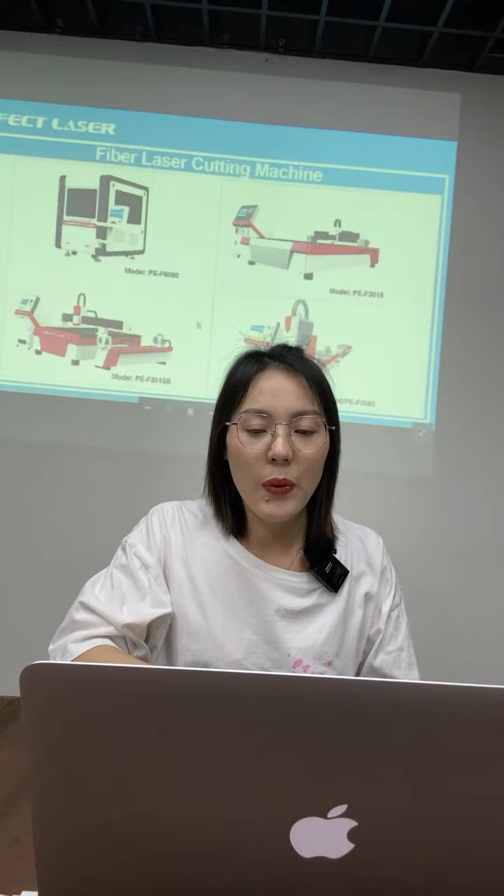Now let's get started to the products, to the machines. You can see we have many different types of fiber laser cutting machines. The first type is a full enclosed type, this one, model PEF6060.

For this model, it has a 600 by 600 millimeters working area. And you can see the second model, PEF3015. This model has a bigger working area, so you can choose such as 3000 by 1500 millimeters, and some other working area based on your request.

For the model PEF3015, this model is a very hot selling model in our company. This one is mainly for cutting flat materials, for all kinds of metal materials, such as stainless steel, carbon steel, mild steel, galvanized sheet, aluminum. For different thickness, such as 1 millimeter, 2 millimeters, 3 millimeters, 5 millimeters, or some other thick material.

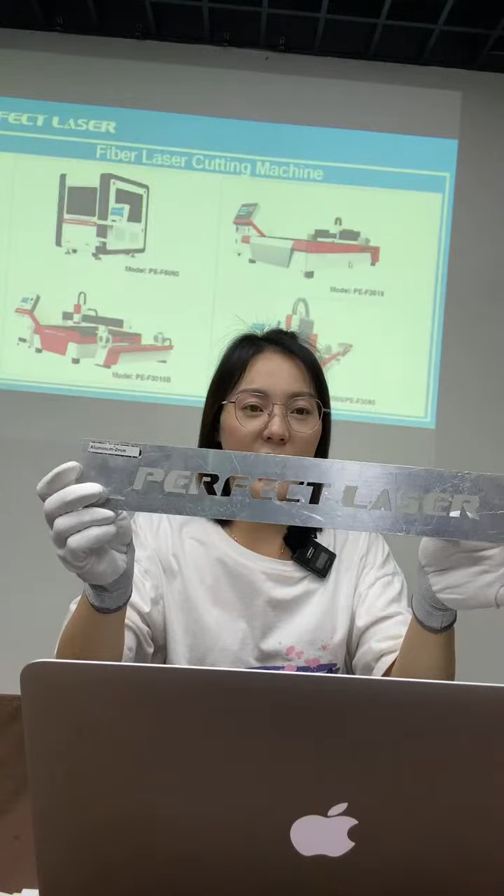Okay, so you can see, such as this one. This is a Perfect Laser, this is our complete name. This one is aluminum, 2 millimeters thickness. The material thickness will be 2 millimeters, and this is an aluminum material.

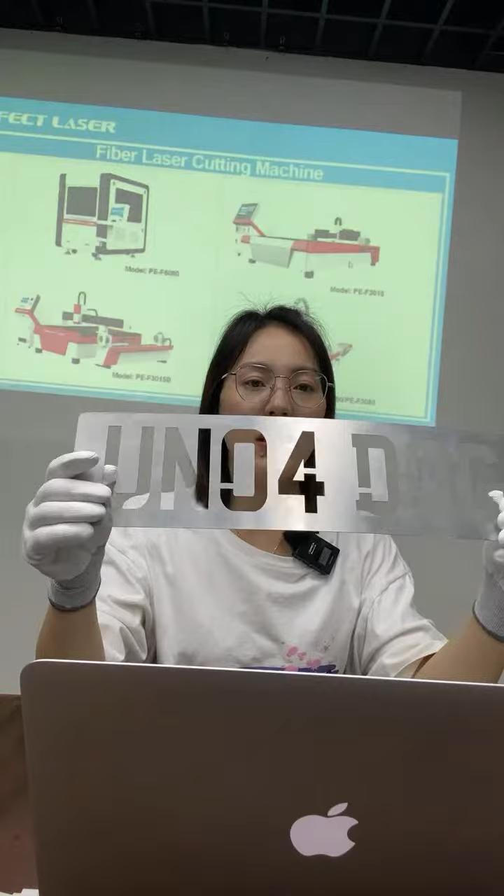Well, some other one, this one is also an aluminum material, but this one is very soft.

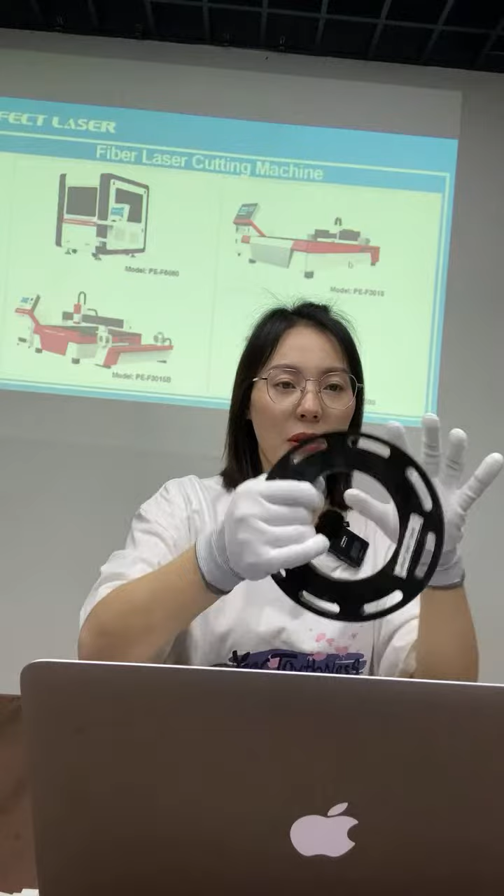So this is, and also for some, I would like to show you some thicker one. Well, for this one is very heavy. This is a carbon steel 12 millimeters. Wow, carbon steel 12 millimeters. So you can have a look. Yeah, this is a carbon steel 12 millimeters.

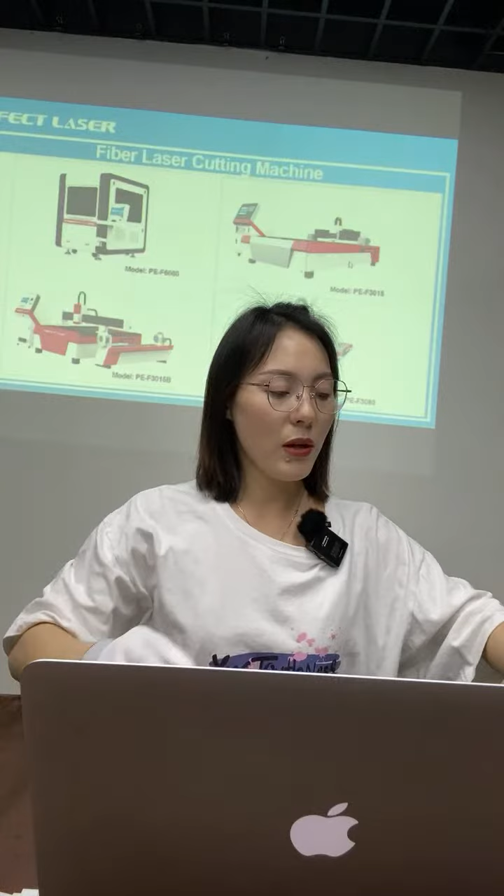Okay, and well, and also this one, well, it's a star. This one is carbon steel, 15 millimeters. Wow, very thick.

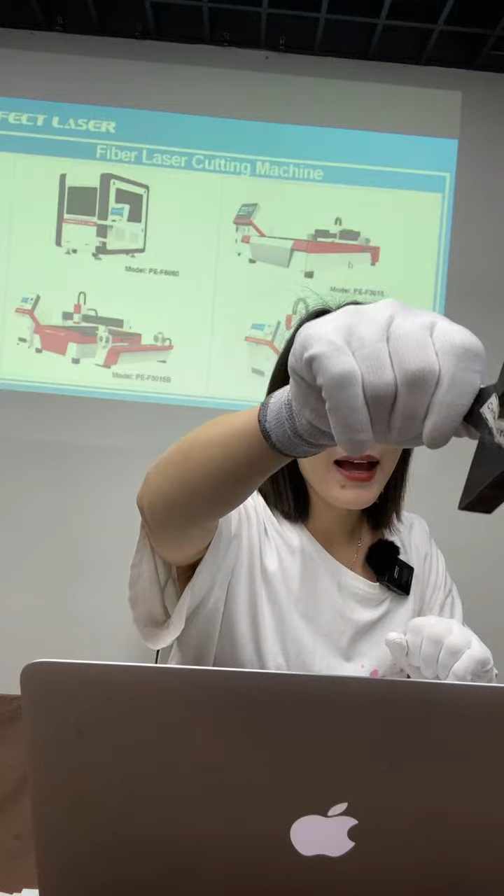Yeah, hello everybody. So you can see right now, this is the fiber laser cutting machine. Fiber laser marking machine, fiber laser cutting machine.

Sorry, so this is a carbon steel, 15 millimeters thickness. Wow, it's very thick, right? So you can see the cut, it cuts like this kind of different shapes, different patterns, different designs.

And well, also for some high precision cutting, you can see even the very small curves there, right? Very small curves, very small part, it's very tiny part. The fiber laser cutting machine, it also can have a very precise cutting effect.

Okay, well, and also this kind of, well, you can see this different, it has many different shapes, different design, different patterns there.

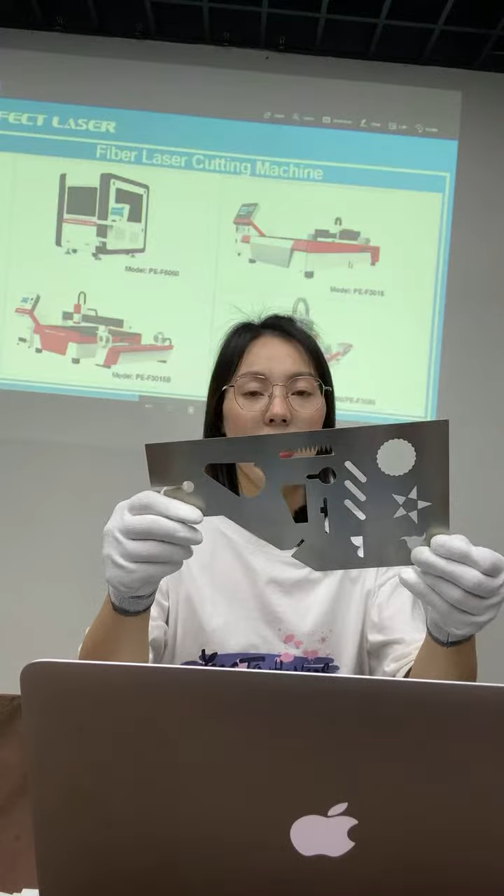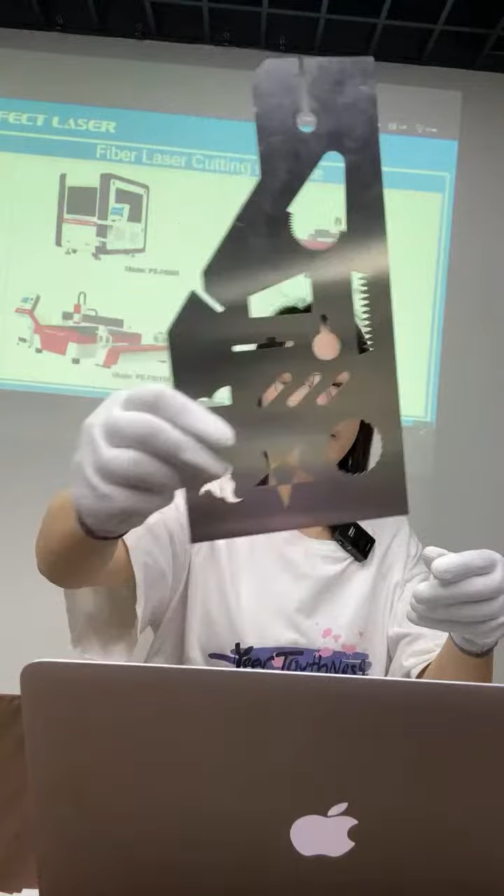So the fiber laser cutting machine, it has a very good cutting effect.

Yeah, and also this one, wow, this one is very nice. It's a big thumbs up.

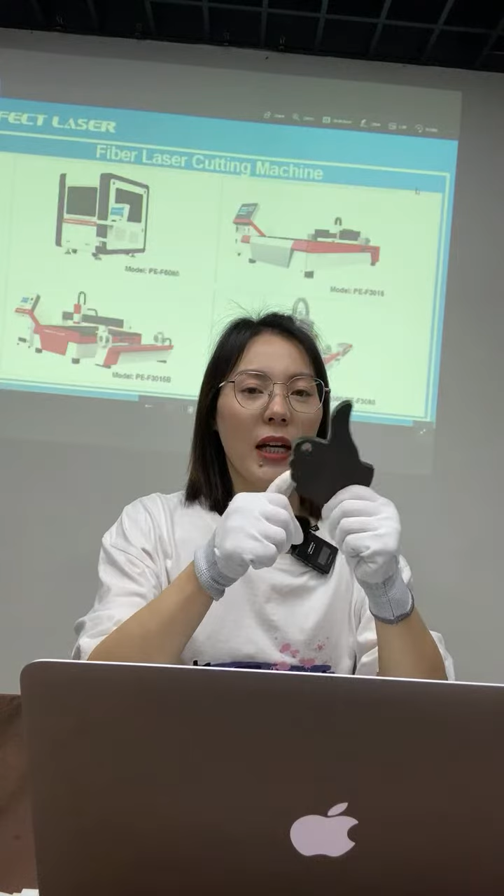So right now you can see this is the cutting samples, some samples done by the fiber laser cutting machine. But the fiber laser cutting machine, and also this is a carbon steel material, and the thickness is around, it's around 10 mm.

It's around 8, I think 8, around 8 millimeters. Well, so you can see this one is 12 millimeters. Well, so this one is around 10, okay, around 10 millimeters.

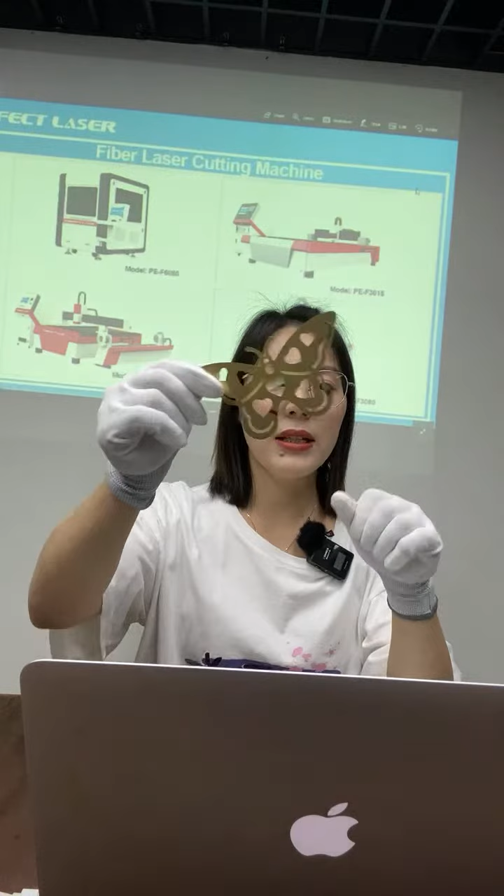Okay, so right now you see this is all the, yeah, some cutting samples by our fiber laser cutting machine. And also this one is another material, you can see this is a copper material with 3 millimeters thickness.

Yeah, copper material.

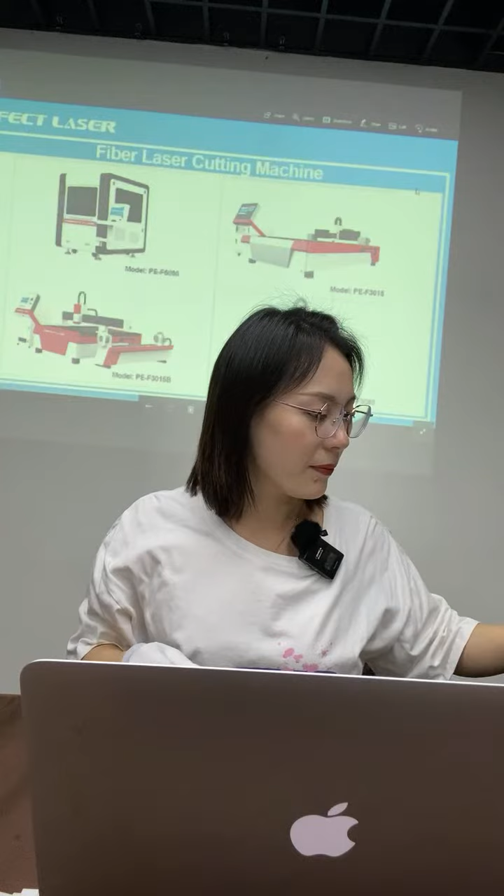Wow, and this one, wow, this one is very nice. Yeah, I like this one very much, even though it's very small, it's a very small part. You can see for the feathers and also the eyes, each part, and the mouth, each part, it has a very clear.

Yeah, it's very nice, right? Even you can see the mouth and the eyes. The very small part, it has a very precise cutting effect.

Okay, so all of those flat surface marking, yeah, flat marking, those flat marking.

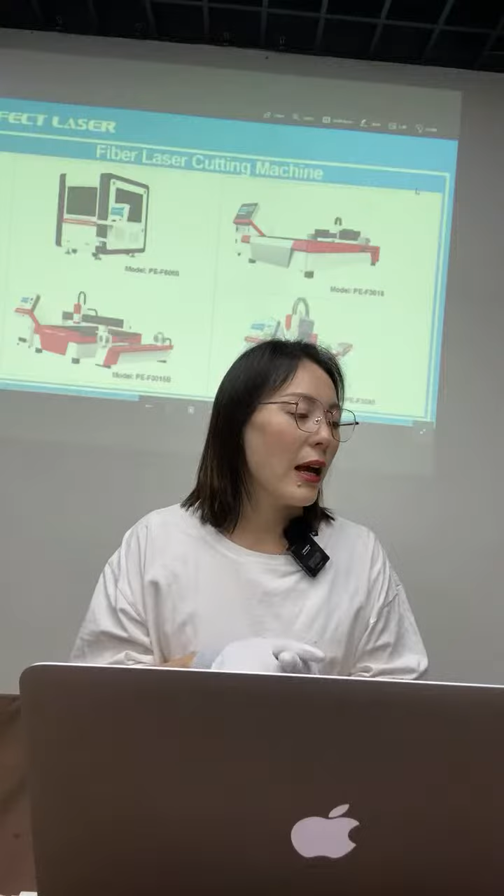Okay, so this is the model PEF 3015. So this model can cut all of those flat surface cutting. And well, for the PEF 3015B, the third model, it can not only cut those flat surface, but also can cut for some square or round tubes.

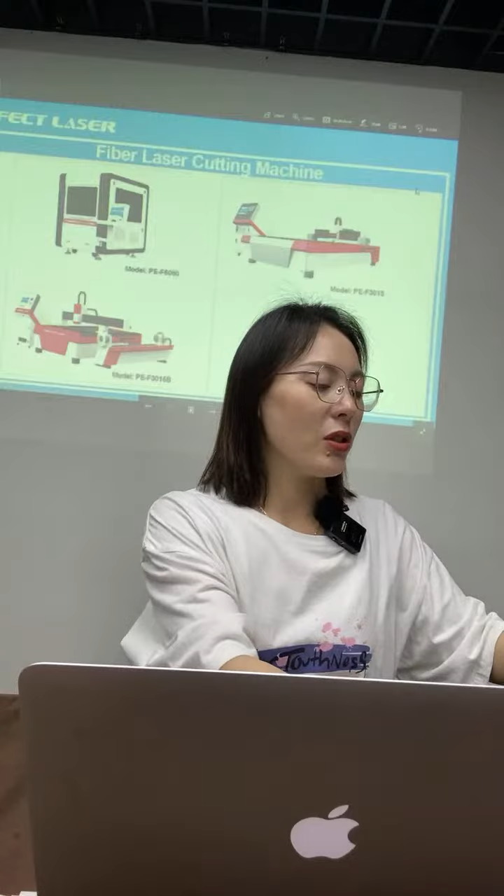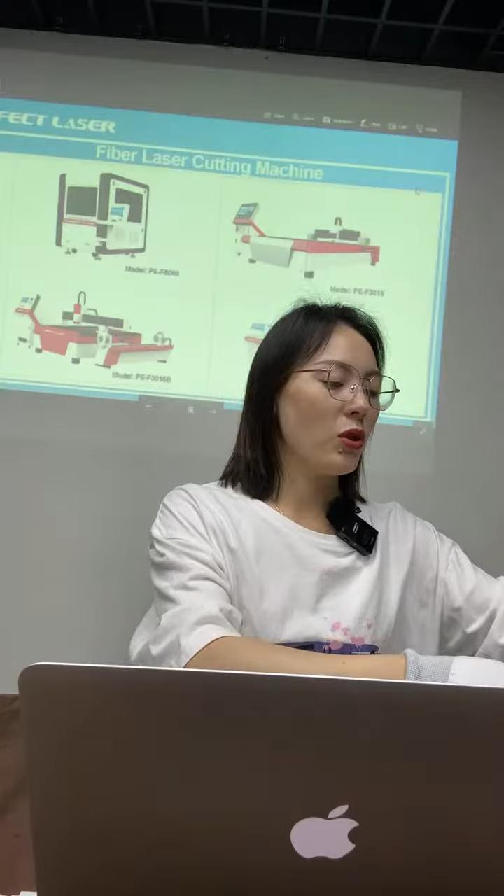Okay, so and also with different diameters. You can see this square one, this is big, this is smaller, right? For different diameters. And also this tube also has a smaller diameter, and also those very big. Wow, this one is very big.

It can hold my whole face in it. Yeah, so this is a very big diameter, tubes cutting.

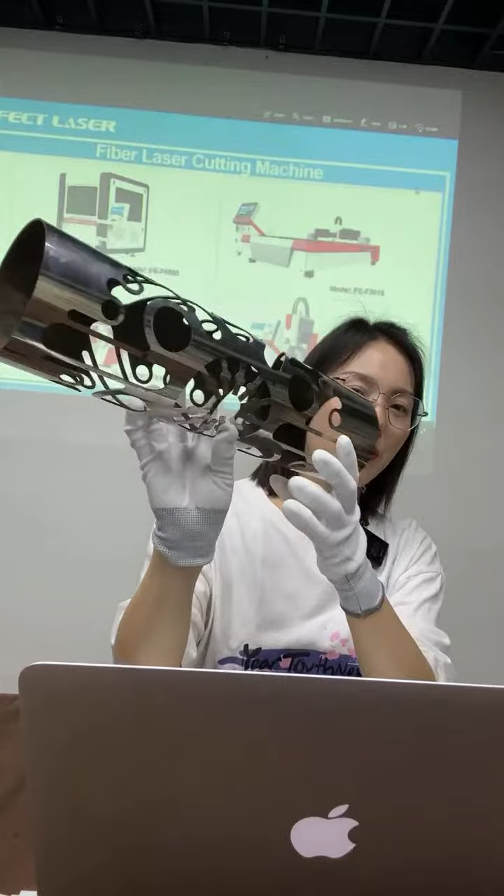Okay, so this is can be done by the PEF 3015B, and well, the next model.

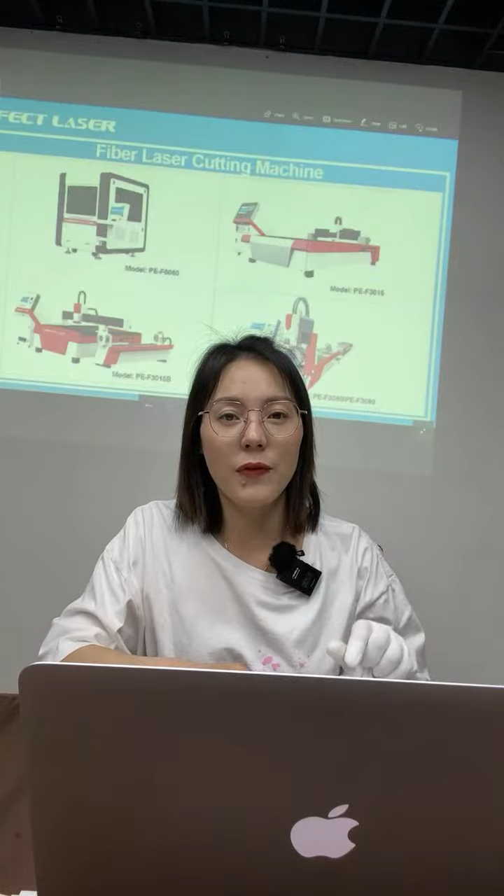Okay, so this is the brief introduction for those 4 models. Okay, now let's take the models one by one in detail.

Okay, so right now we can also have a look at some other cutting samples, right? And this Christmas tree, and some accessories, spare parts, and also some tools. And this one, well, it's very similar with this one, right? So all of those different parts, different designs, it can be cut by those fiber laser cutting machines.

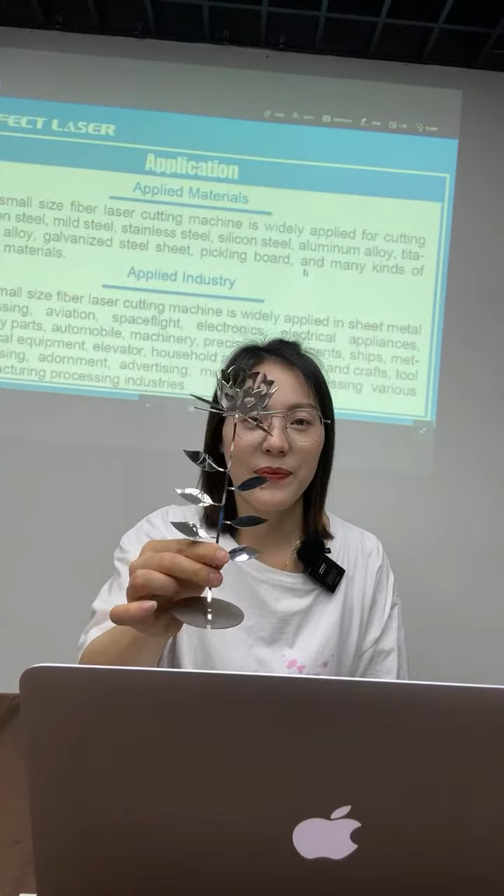Gifts such as this kind - we can make it as a craft, right? It's very beautiful and a very specialized design, a specialized flower. And also some tool processing, adornment, advertising, metal forming processing - various manufacturing processing industries.

Now this is the cutting thickness for your reference. So take example, for 1000 watts.

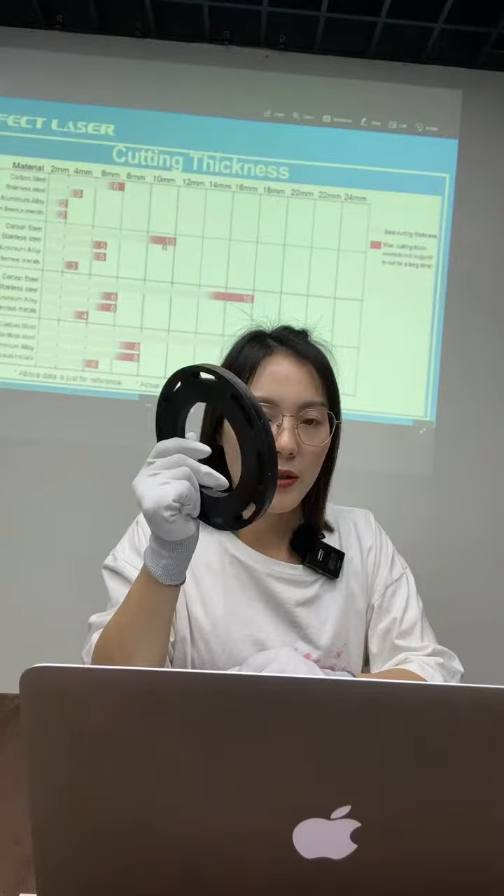This is a carbon steel, so this is 12 millimeters thickness. For this 12 millimeters thickness carbon steel, it's better to use 1500 watts laser power to cut it.

Okay, so for stainless steel and aluminum alloy, with 1000 watts laser power, it can cut a thickness of 5 millimeters.

Hi Ray, hello. Hello, welcome to our live show. Okay.

For example, with 1500 watts laser power, as we showed you, the carbon steel maximum cutting thickness will be 16 millimeters. Also for stainless steel and aluminum alloy it will be 6 millimeters. For 2000 watts laser power, the cutting thickness can reach 20 millimeters. Wow, that will be very thick.

So for the bigger laser power, it can cut thicker material.

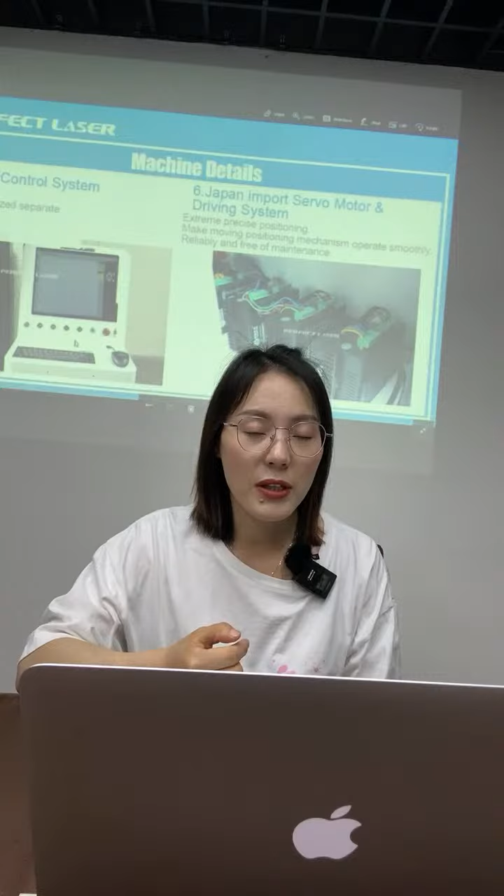Thanks for greeting. Okay, and for this model, we have already installed the cutting software inside the PC system, so with the mouse and keyboard, everything's ready there, and we can operate the software directly and control the machine's working.

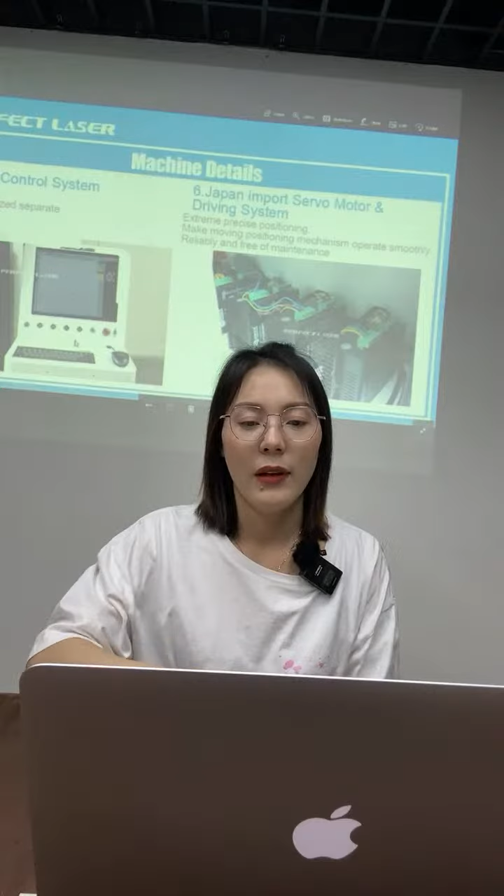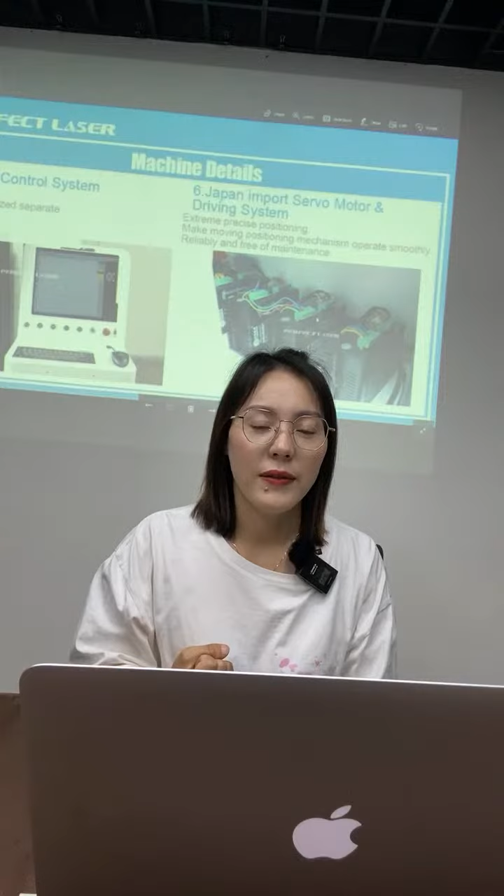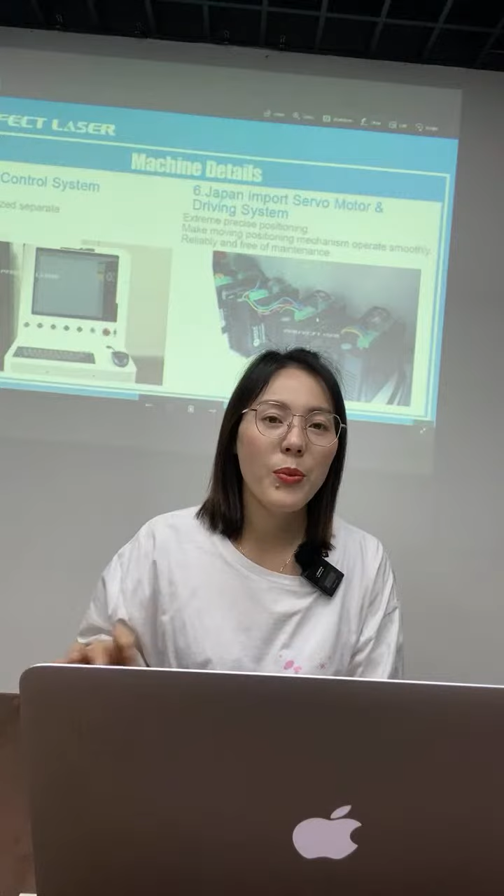And number 6, this is the servo motor. All of this movement requires these servo motors, to keep a very high, extremely precise positioning, and also make sure the movement operates smoothly and reliably.

Hello, yeah, welcome.

And also there is a double rack beside two sides of this working table, so that it will make sure the cutting precision and cutting accuracy, and also make sure the fast cutting speed.

Number 8, this is the control system, an NC Studio control system. It has a very powerful edit function and can meet a wide range of cutting requests.

This is number 9, the collector. Just like a drawer, it will collect the metal pieces. Since during the working process there will be some metal pieces after cutting, this collector will collect all those metal pieces directly and automatically, so it's very convenient to collect and to pull it out.

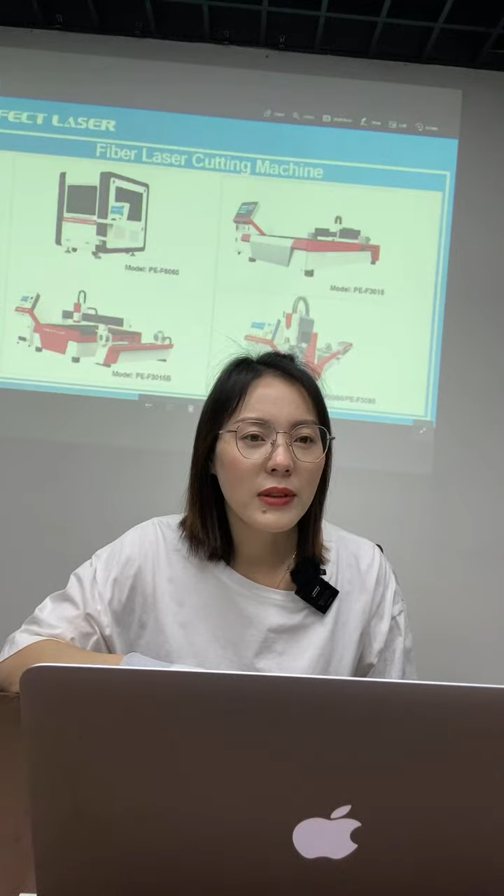This is the brief introduction for the first model, PEF6060. Now I would like to introduce the second model for you, the second model PEF3015. This model has a bigger working area. Now let's take a look.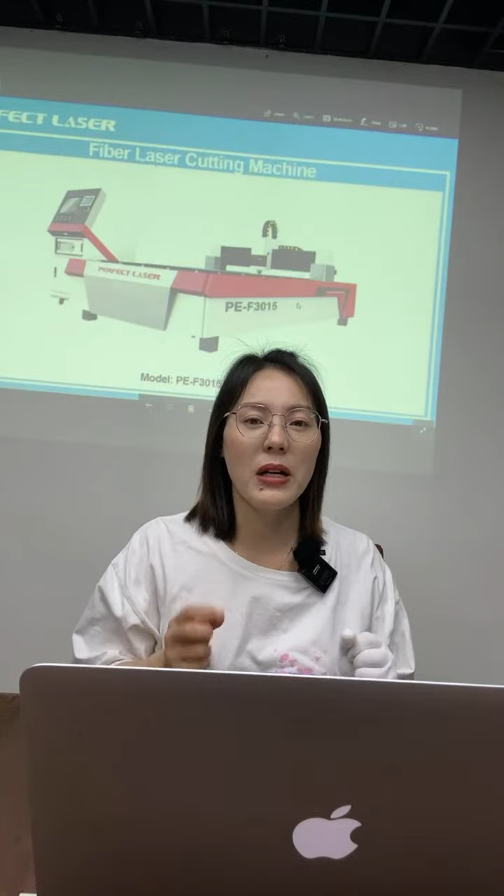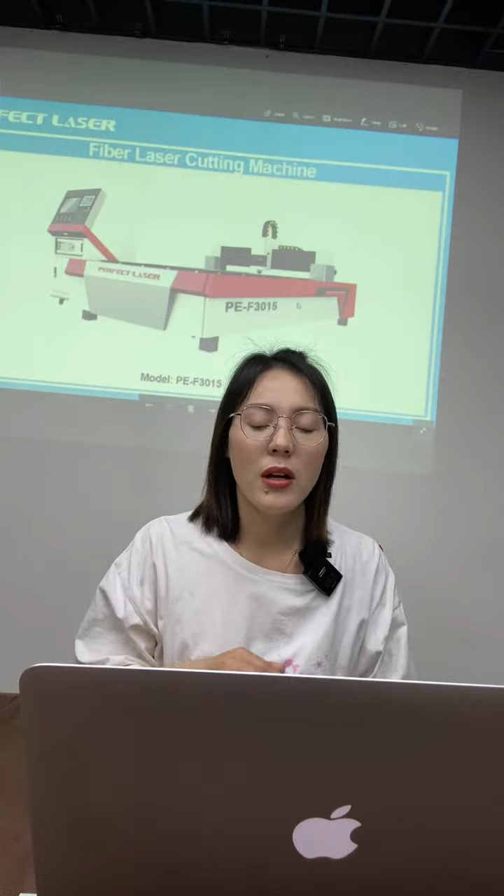You can see this machine is mainly composed of two parts. One is the control cabinet, the control system, and the other one is the machine body, with a working table, a cutting head, and the movement system.

For this machine, the working area will be 3,000 by 1,500. Also some other working areas you can choose, for example 2,500 by 1,500.

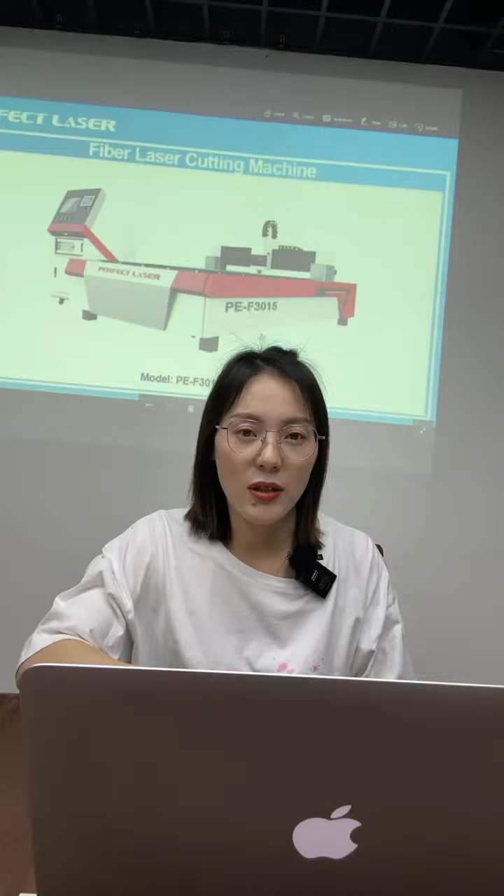Now you can see this part is the main control cabinet on the left, and the right part is the machine body with a laser optical bridge, and also the laser cutting head, with very convenient material feeding wheels. On both sides of the machine there are many wheels, so it will be convenient and very easy for material feeding.

Now everybody please enjoy the working video for this model, so you can have an overview of this machine and know how exactly this machine works.

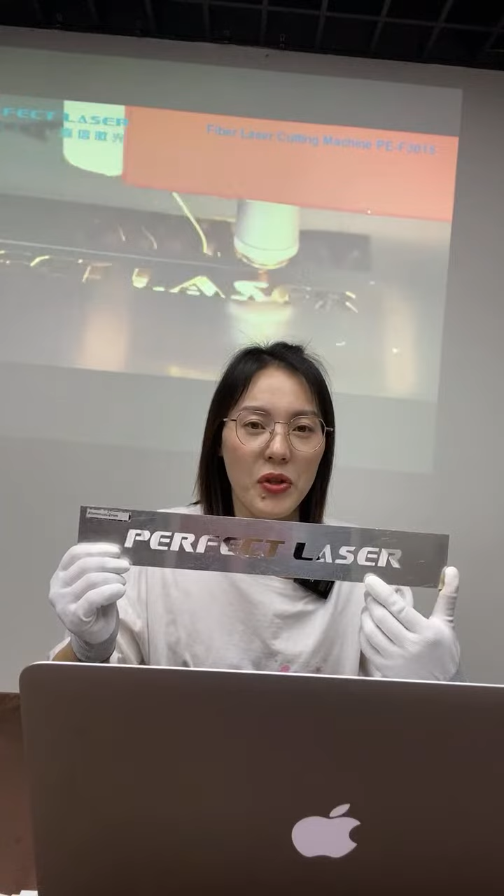Right now we are discussing the fiber laser cutting machine. You can see this fiber laser cutting machine, it can cut all kinds of metal materials.

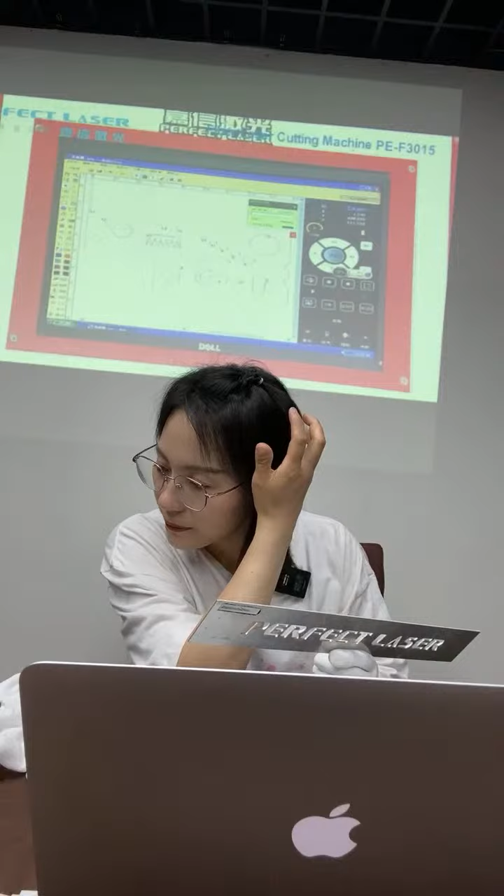Yeah, this one I also have a similar one, just like this one with circles and some other designs, and the star, and the very little curves.

Well, this is very similar to the one in my hand.

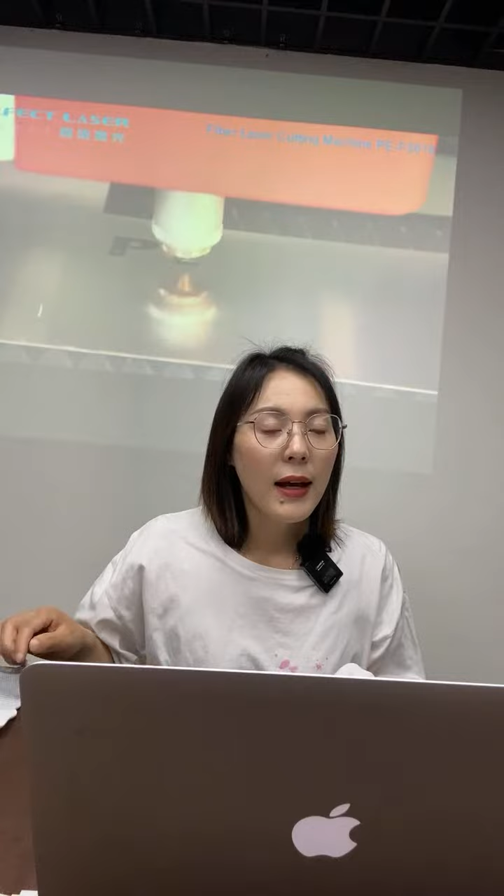Perfect laser, okay. Hi KJ, hello, welcome to our live show. Right now you see this is the fiber laser cutting machine working video of our model PEF 3015. The fiber laser cutting machine can work on all kinds of metal materials for different thicknesses, such as stainless steel, carbon steel, mild steel, galvanized sheet, copper, and zinc. All of these metal materials can be cut by this fiber laser cutting machine.

Perfect laser, I also have this one in my hand. This is the working video for this model. Let's go on and take a look at the details.

Do you have an enclosed machine? You mean enclosed one? Just now I introduced the first model, which is an enclosed type. Yeah, this one is an enclosed model.

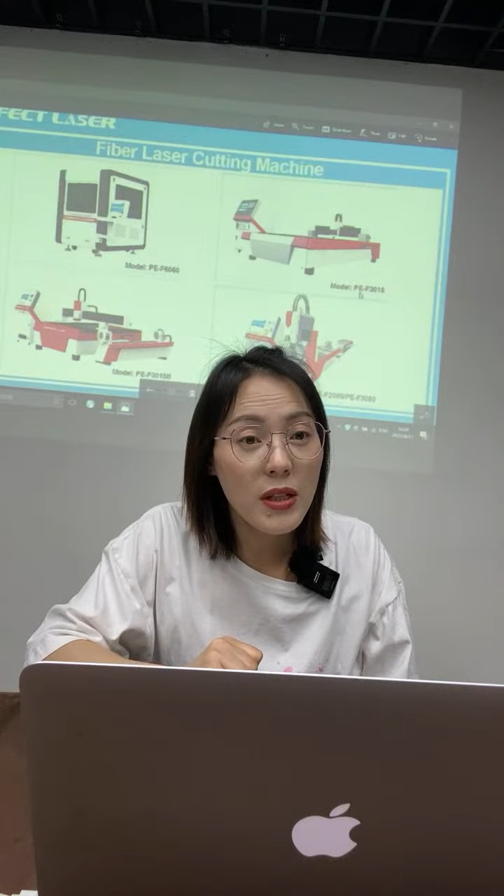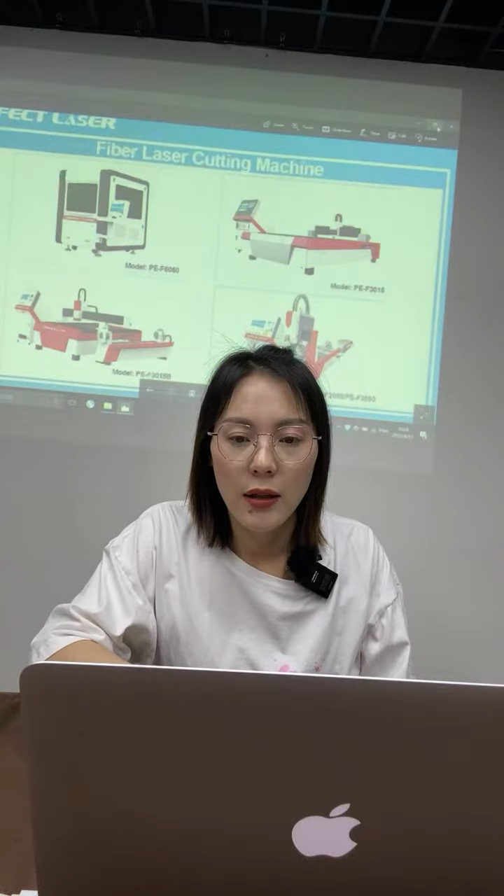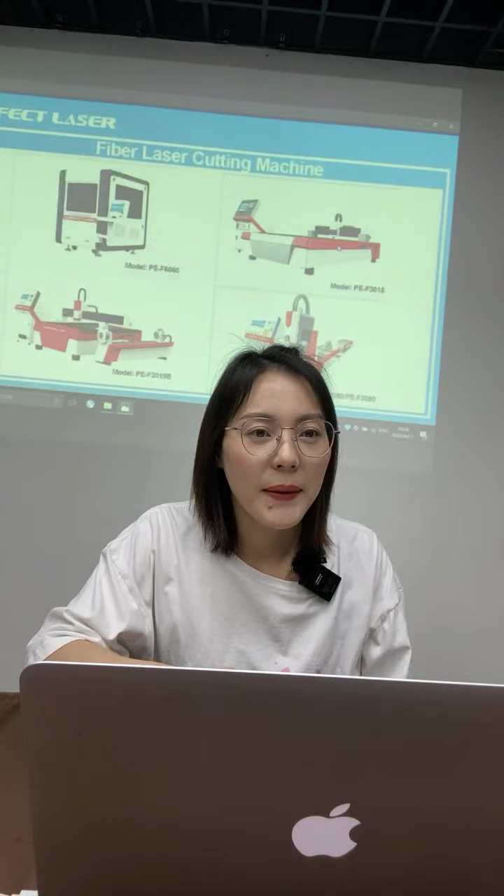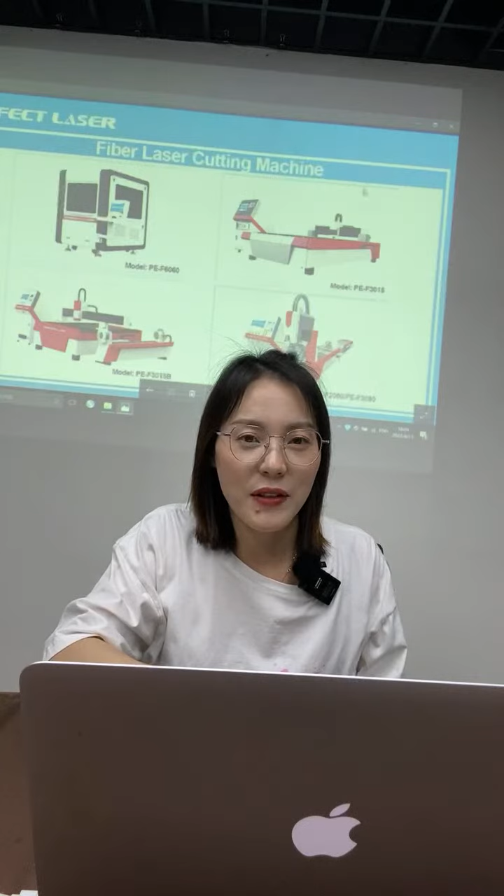Oh, so this model, you can choose 1,500 by 2,500 millimeters, but this one, maybe we can make it enclosed, plus another cover, but I need to check that.

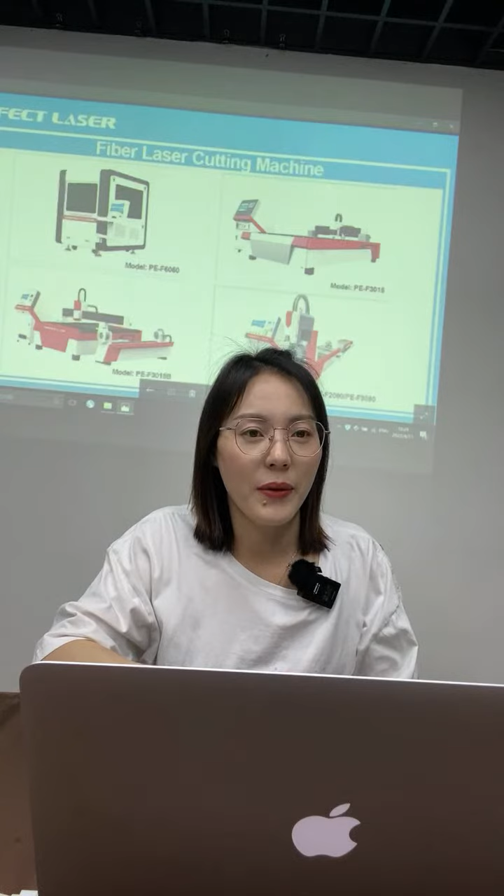Yeah, so this one is the PE-F3015. This model we can make for this working area, but if you want to make it enclosed, I need to check whether we can add an enclosed cover for this model.

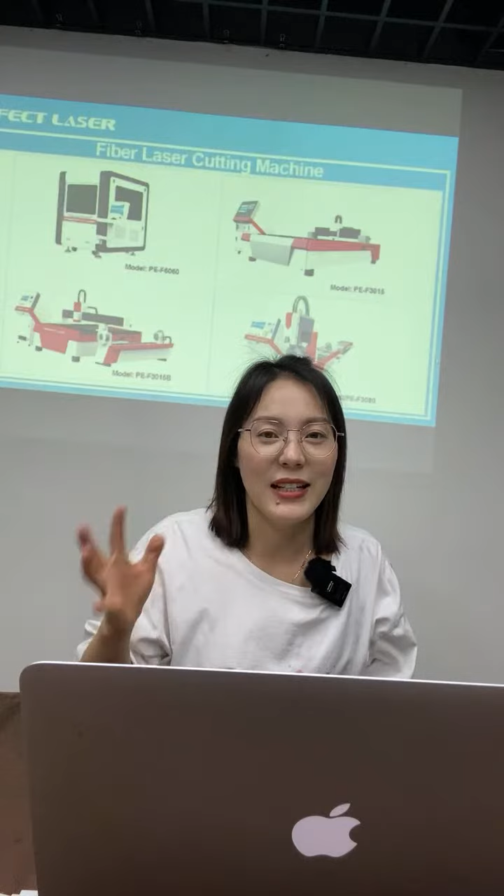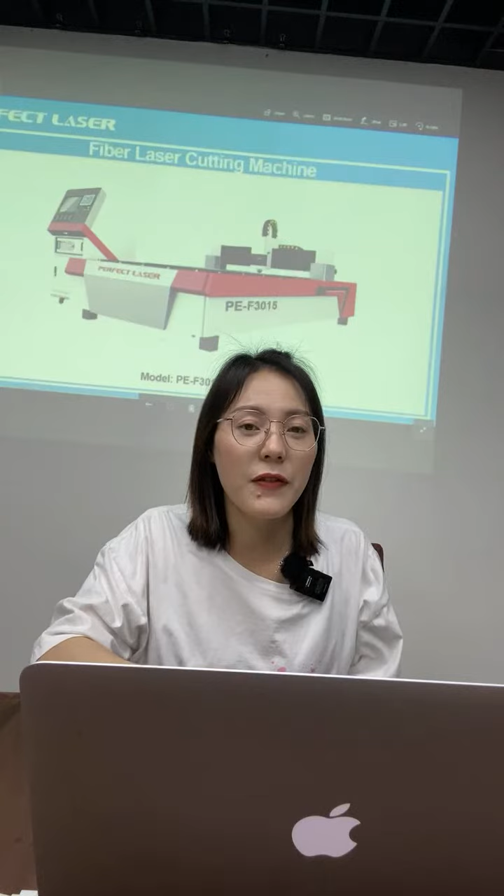So this model's working area can be 3,000 by 1,500 or 2,500 by 1,500. The different working areas we can choose. So you need this one to be enclosed.

1.5 by 3 meters, yes, that's right. Yeah, this model, the working area will be, okay.

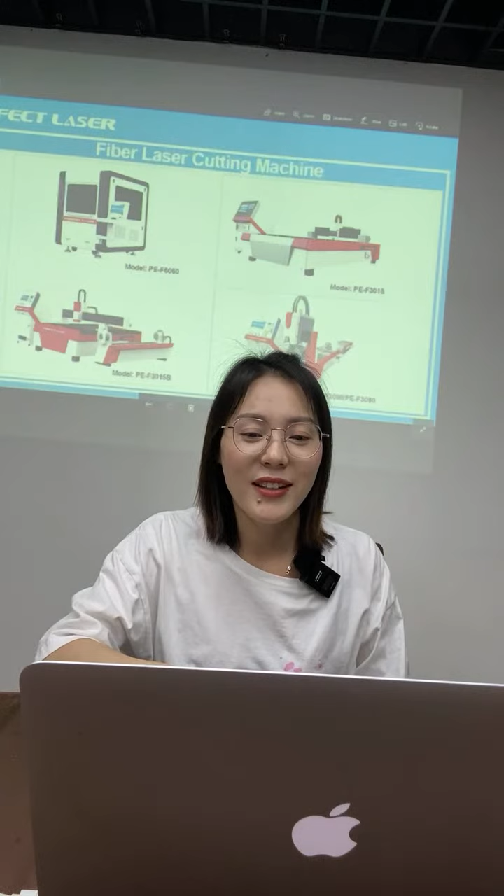Because we have full confidence that our machine can satisfy you, and also to make sure you have no worry about the warranty time. So everybody, that's the second model introduction, about the PE-F3015. Right now I would like to introduce the third model for you.

Wow, this model - so just now the PE-F3015 is mainly for flat surface cutting, okay? Right now this model, the PE-F3015B, can not only cut all those flat surfaces, but also round or square tubes.

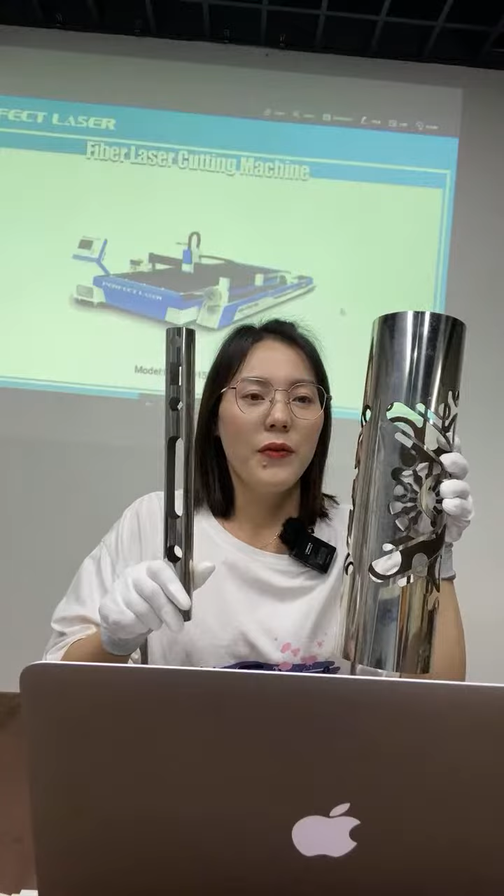Let me show you some samples here. For all those flat surface cutting, and also for those round ones - this round also with different diameters, for those smaller ones or very big diameters. You can see this one, very big, right? For those round tubes or pipes cutting, and also for those square tubes and pipes.

So right now this model can cut not only the flat surfaces but also round or square tubes. The controller structure will be almost the same as the PE-F3015. The only different part will be the rotary cutting system. You can see this is the control system and the cutting head, also with the DSP remote controller.

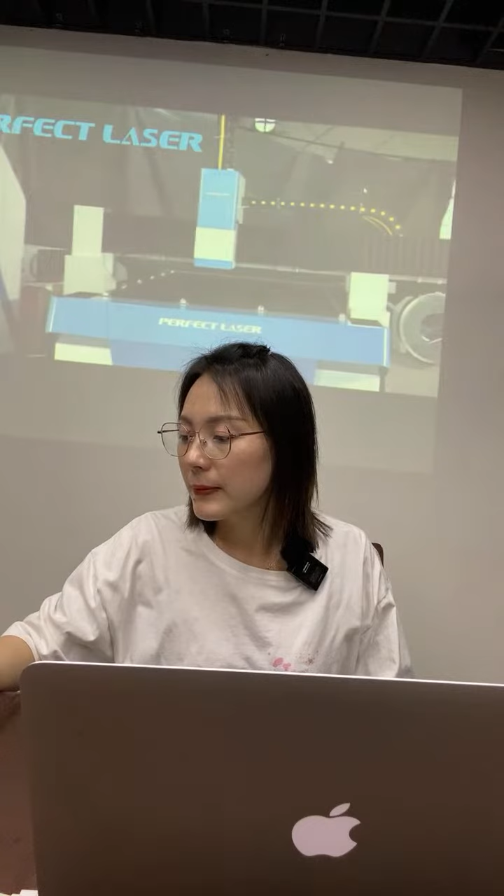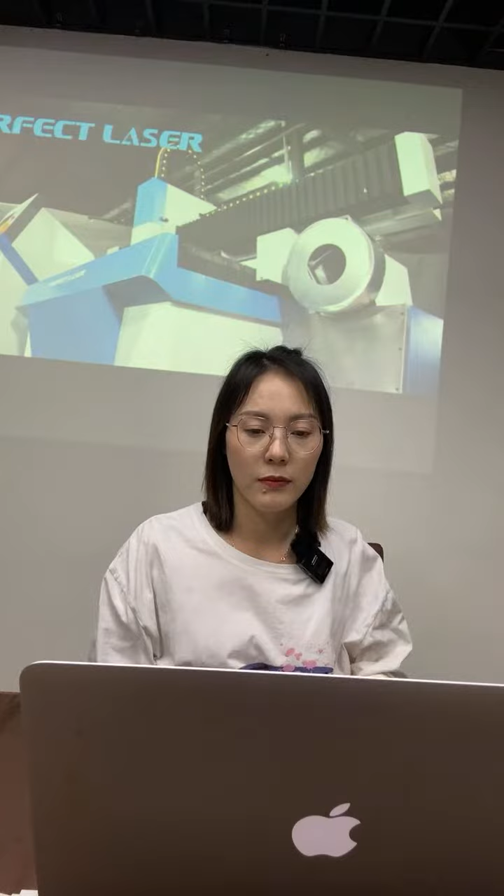Right now I would like to share the working video for this model for you. So right now you can see this rotary part - how does it work?

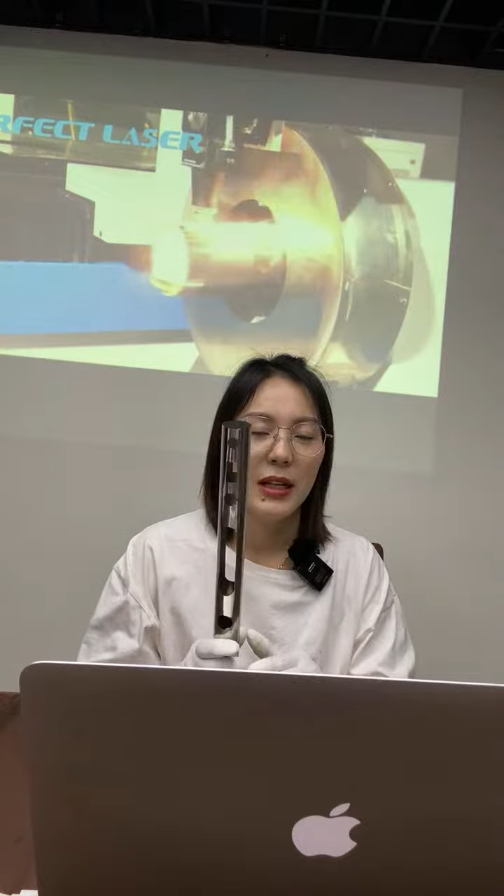So right now, this is the rotary part, just like this one - smaller diameter right now. Wow, this one is a big one. I also have this big one. Well, we can see it has a very fast cutting speed, right, for such a big diameter tube. You can make it turn around and cut.

So this model, you can see, can not only cut for those flat surfaces, but also for round or square tubes cutting - for those plain or round or square tubes cutting. So this is the PE-F3015B. Well, this is some other cutting samples, you can have a look.

Now the details - in fact it has very similar details to the PE-F3015. The same laser source, Raycus, IPG, Max, all those insured brands to make sure the long-term use of the machine and also the high quality. We can see it has a 100,000 hours working life, and also without extra maintenance cost, it's very economic.

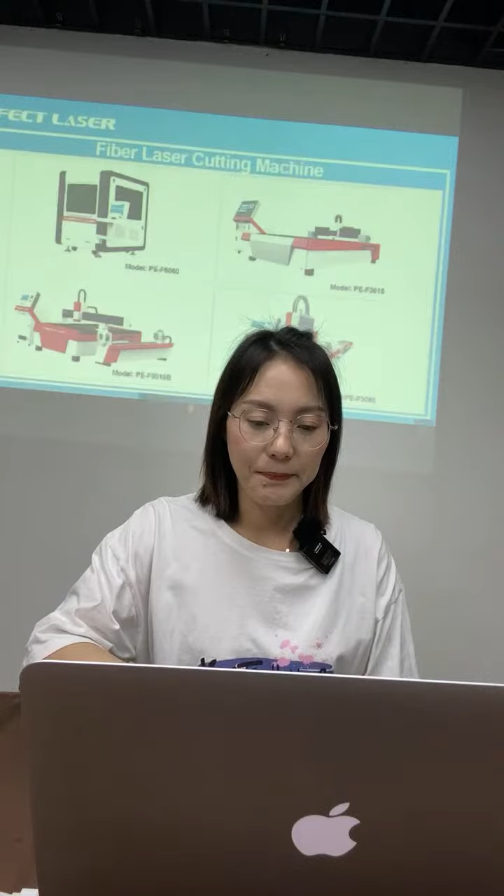So till now, I have introduced those 3 models. The last one I will introduce is this model, the PE-F2060, or PE-F3080 - the same machine with different working areas. This model is mainly used for cutting tubes, not for plain cutting.

Let's take a look at the introduction of the main configuration. This is the control cabinet, the control system. This part has a rotary fixture head and a laser cutting head. These are some cutting samples - you can see different diameters, square or cylinder or round.

Now let's share the working video for you. This is the working video - you can see with the rotary fixture, it will turn around.

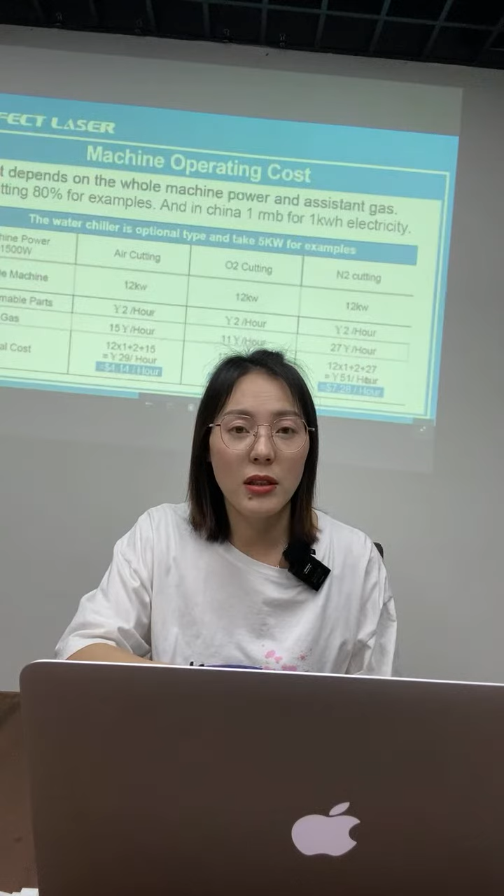And for the nitrogen cutting, you can see the total cost will be $7 per hour. So my dear friend, we can see that the oxygen cutting will be economical, while the nitrogen cutting will cost a little more.

Well, now let's take a look at the cutting result. For example, you can see the left one is the oxygen cutting sample, while for the nitrogen cutting sample, you can see it will be very shiny and sparkling. After the cutting, you can see the cutting surface is very shiny and sparkling, very beautiful, very nice. While for the oxygen cutting, the color will be a little dull, and it's not as shiny as the nitrogen cutting sample.

So my dear friend, if you are only doing some tests or cutting some samples, you can choose the oxygen cutting. Well, if you want a higher, better cutting effect, it's better to choose the nitrogen gas for cutting.

Okay, hi, I'm Almat. Hello, my dear friend. Welcome to our live show. So today we are discussing the fiber laser cutting machine.

Okay, so right now this is the gas cost comparison.

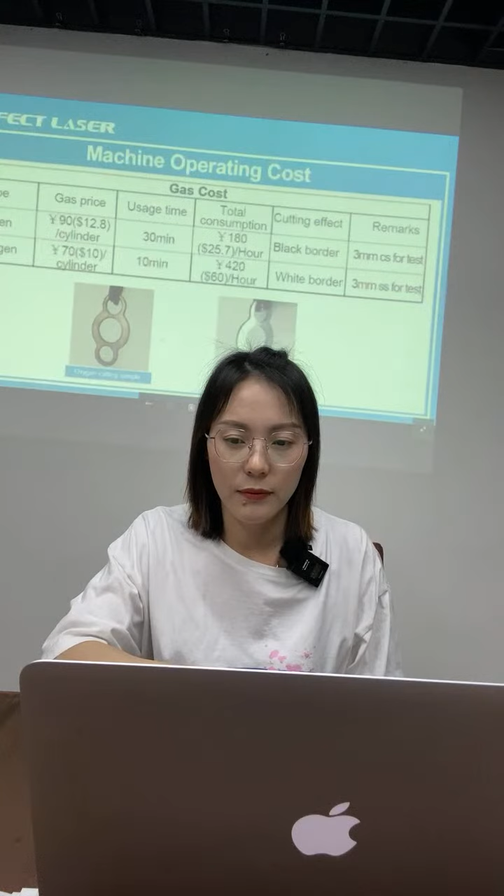Now, for the after-sales service, normally our warranty time is 12 months. But in today's live show, I can provide you a 24 months warranty time.

During the warranty period, if you have any request such as installation, operation and adjustment, maintenance, or any other questions, you can contact us anytime, and we will help you solve the problem immediately.

We will also offer you updating software, cutting software, during the warranty period.

All of our machines have a very strict quality control system. You can see all of our machines have a 48 hours running test and a 72 hours aging test, to make sure that when our customers receive the machine, it can work in a very good status and condition.

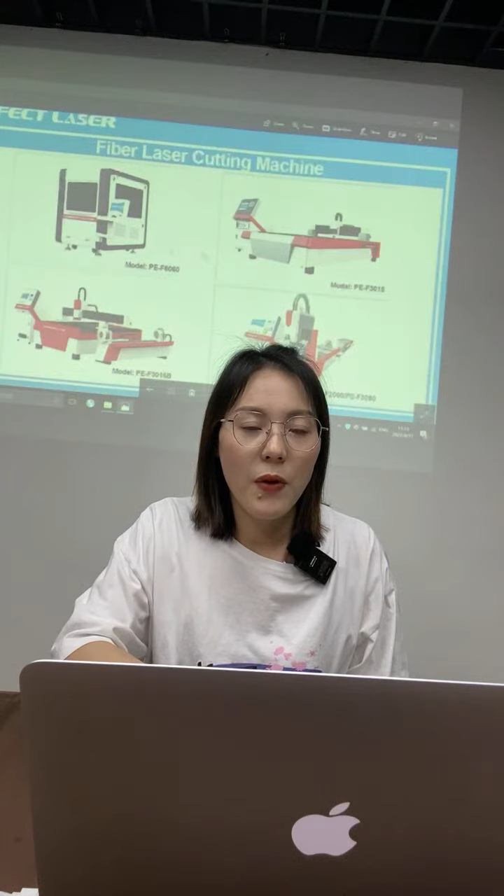All of our machines have CE, ISO, and all those certificates. I would like to share some of our certificates with you. For example, this is the CE certificate.

And also this is our RoHS certificate for you to have a look. It means that our products comply with the European standard, so it's really very safe to buy from us.

And also this is a golden supplier certificate, verified by the SGS company. SGS is a well-known international inspection institute, so through SGS verification, it's really very safe and no worry to buy from us.

And except that, you can see our machines also have many other different certificates to prove that our machines really have a very good quality.

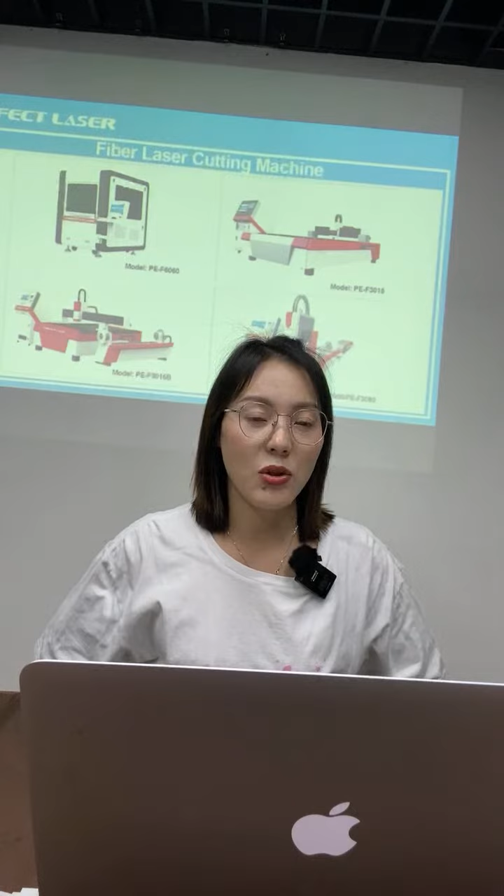Hello everybody, welcome. So number 2, the model PE-F3015. This model has a bigger working area, such as 3000 by 1500 millimeters.

This one is mainly used for cutting plane and flat surfaces, such as plain plate or flat board.

And for the PE-F3015B model, it cannot only cut for those plain plate, flat products, but also round, cylinder, or square tubes and pipes.

And also number 4th model, the PE-F2060 model or PE-F3080 model. This model is mainly used for cutting round or square tubes or pipes.